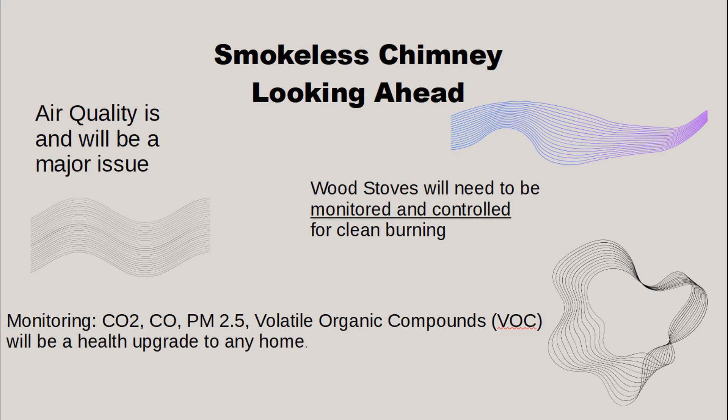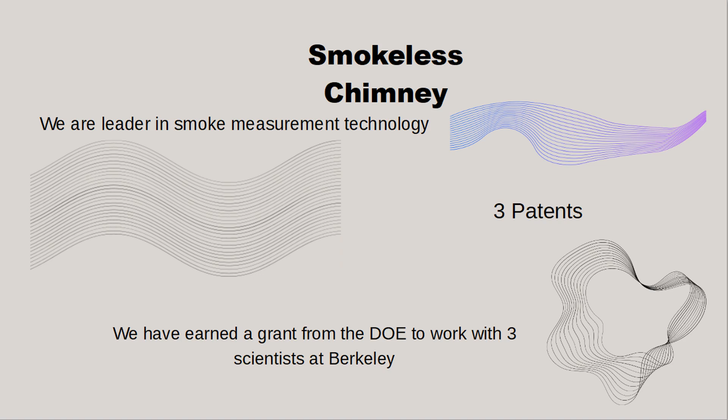Looking ahead, air quality will be an issue, and wood stoves will need to be monitored and controlled for clean burning. If I'm doing indoor air quality, I'm looking at CO2, CO, PM2.5, and VOCs. Measuring any two of these is an improvement to any home. We are a leader in measuring smoke. We have 3 patents, and we've earned a grant from the Department of Energy to work with 3 scientists at Berkeley. It is a pleasure to work with very sharp people.

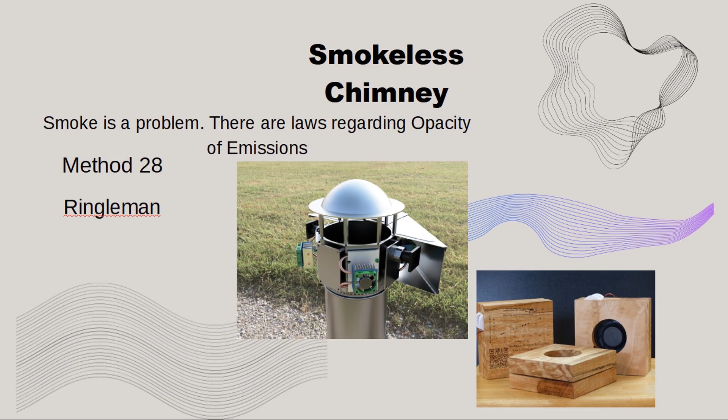Smoke is a problem. There are laws regarding the opacity of smoke emissions from stacks. The law mentions Method 28, but all you really have to remember is the Ringelmann method. It's a method from the 1890s from the Bureau of Mines, and it's colored pieces of paper. Our solution is to use an opacity monitor and combustion air control systems.

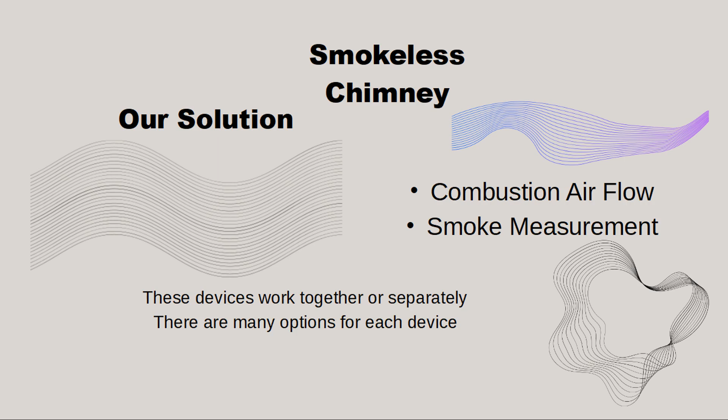We make combustion airflow systems and smoke measurement systems. These devices can be used together or individually. For example, the University of Berkeley, their National Fire Lab, they only want to use the smoke measurement system. I have one system that uses both. I also have another wood stove that uses only the combustion airflow system. They both work together. They both work apart.

A brief history of smoke measurement. My first job in smoke measurement was in 1982. Got hired by a large fire lab that had about 6 to 10 pieces of equipment that required regular calibration of their smoke measurement systems. In 2005, incandescent light and photoresistors were still being used. When I presented to the Fire Materials Conference in 2018, we were using digital light sensors and photodiodes. There's a big difference between the two.

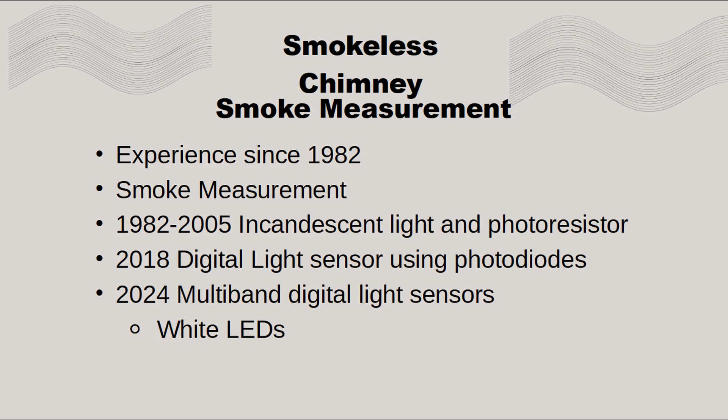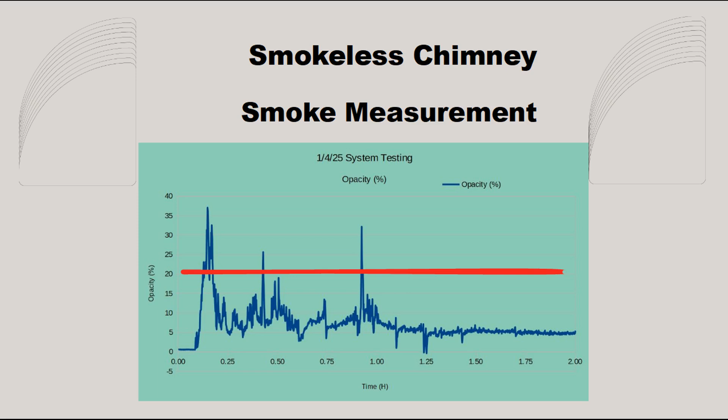What we can see is that the red line is 20%. That's the point where you don't want to exceed that for more than 6 minutes consecutively in any hour. So we have a startup time about 4 minutes over the 20%, and that's allowed because it's part of the startup time. We have 2 other events that briefly go over the line, but just for a few seconds. We'll say a minute each. For the most part, we're running around 10, and then after we stop putting fuel on, we're running around 5% opacity.

To proceed further, we're going to have to give a briefing on principles of light scatter. Rayleigh scattering is up in the upper atmosphere where molecules are not very close together. The blue light is scattered, and that gives us our blue sky. Closer to the Earth, let's say within a mile of the ground, the molecules are too close together, so we're under Mie scattering rules and Tyndall scattering rules. Mie scattering is when particles are larger than the peak wavelength, it blocks the light, resulting in opacity. So opacity is under the Mie scattering rules.

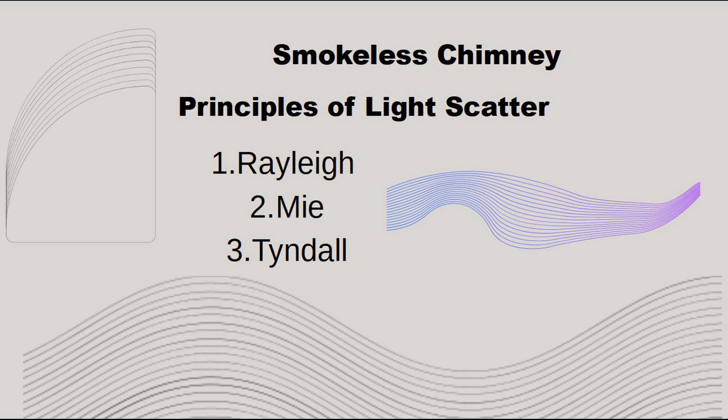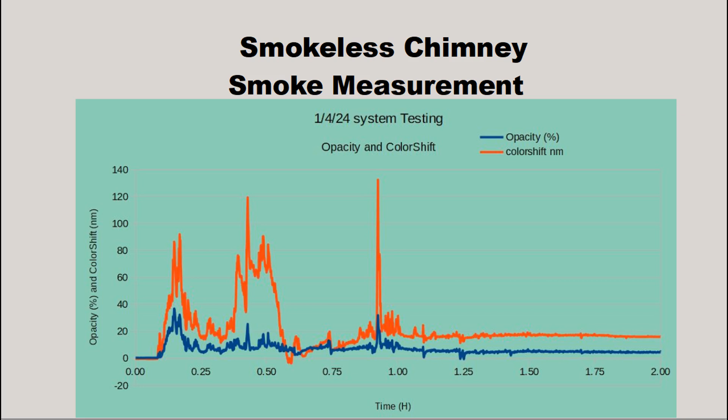The color shift is in nanometers, a shift in the peak wavelength. In other words, we're saying the color of the light is shifted to the red just a little bit. 100 nanometers, 120 nanometers on the peaks on this one.

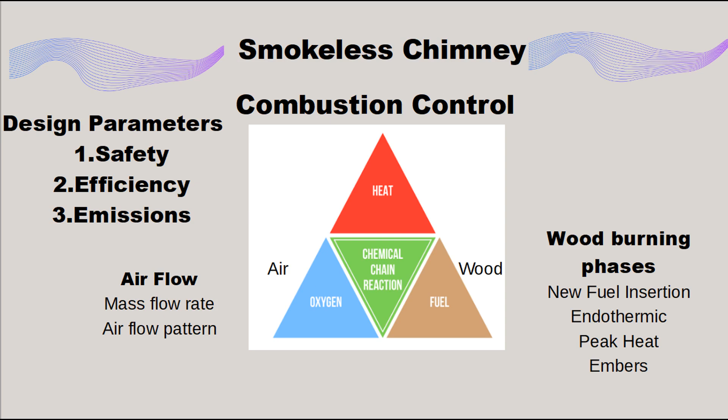We're going to talk about combustion control. Design parameters are safety first, efficiency, and emissions. When you get the efficiency right, the emissions just come in line. We're going to adjust our airflow, the mass flow rate, and the airflow pattern. For our wood burning phases, we're going to talk about new fuel insertion, endothermic phase, peak heat phase, and embers, or the tail of the fire.

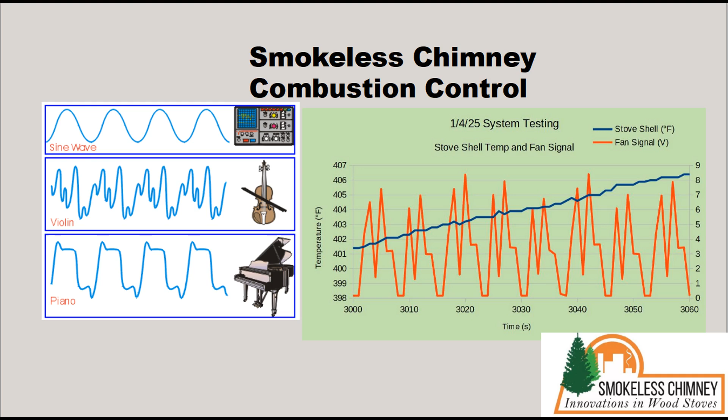These are the commands sent to the fan, where it spins up, spins down, spins up, spins down, and the fan takes time to spin up and spin down. However, these are the commands sent to the fan. And the result is over 1 minute, we get about a 5-degree rise in our wood stove from 401 to 406 in 1 minute. That's a great rate of rise. So this airflow pattern is working.

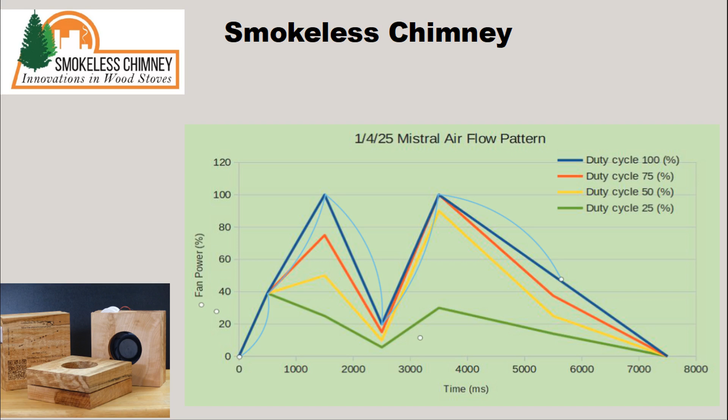This is a chart I made to explain to people what this waveform looks like. About the first half a second, it's getting the fan spinning. And then depending on the duty cycle that I send to the fan, it follows a very prescribed curve for about 8 seconds. Now, if it's spinning really fast, it's going to go beyond 8 seconds, but then the next waveform takes over.

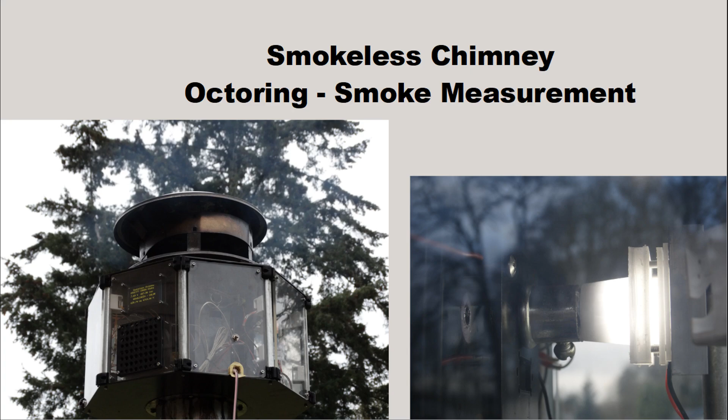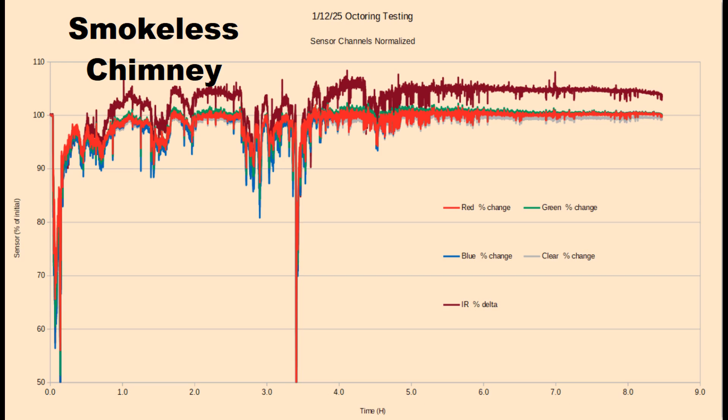But let me tell you what I see. So we get into the test about an hour and the infrared goes above 100%. I'm saying that's heat from the chimney, hot particles from the chimney radiating into the sensor. The other thing to look for is the blue caps on the stalactites. So if you know stalactites, they hold tight to the ceiling. The stalagmites might have. So these stalactites have blue caps. That means the blue scattered more than the other wavelengths of light. That's the shift to the red that you see in the color shift.

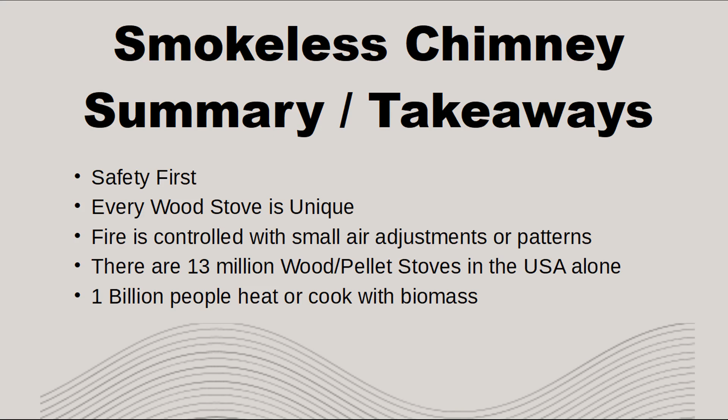These are the takeaways from this. Safety first. We want our wood stoves, our pellet stoves to be safe. Every wood stove is unique, has a unique operator, chimney system, and house. Fire control with small air adjustments or patterns are key. There are 13 million wood and pellet stoves in the USA alone, and 1 billion people heat or cook with biomass.